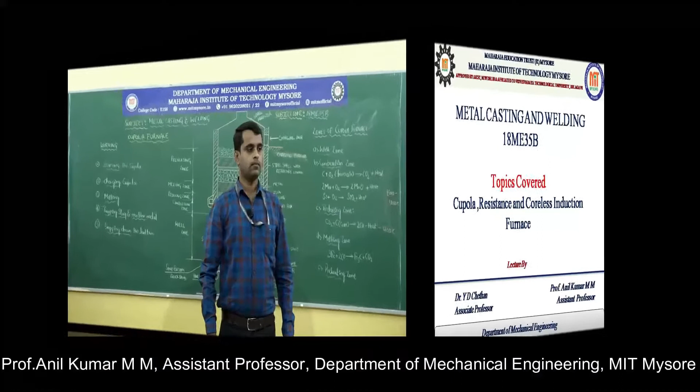In the previous session, we discussed different types of melting furnaces like direct and indirect electric arc furnaces, and fuel fired furnaces like coke fired, gas fired, and oil fired furnaces. In this session, we will discuss the construction and working of the cupola furnace. This is the block diagram of the cupola furnace.

Cupola furnace is used for melting only cast iron material. Although other furnaces like induction furnaces can also melt cast iron, the quantity melted is very less, around 10 to 25 kgs. But if you require large tonnage of material, the largest tonnage can be melted by using the cupola furnace.

This cupola furnace is mainly meant for melting only cast iron, and it is a vertical type of cylindrical furnace. Now let us discuss the construction and working of the cupola furnace.

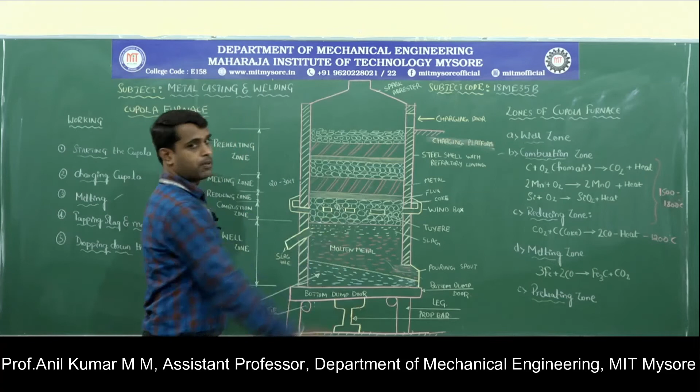Next zone is the melting zone, where the molten metal gets melted. This is located above the reducing zone, meaning from the top of the coke bed to the top of the metal charge. Here melting takes place as hot gases transfer heat into the metal, causing the material to melt.

The molten metal trickles down through the coke bed into the well zone, where it is collected. Iron reacts with carbon monoxide to give iron carbide and carbon dioxide. This reaction takes place in the melting zone.

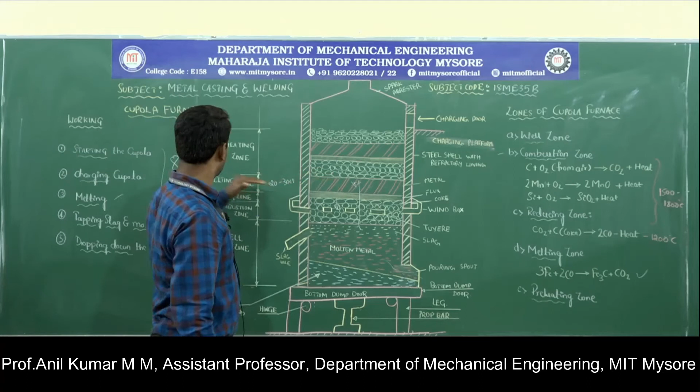Next is the preheating zone, located at the top of the melting zone, above it, from the top of the metal charge to the charging door. Here hot gases move upward in an ascending manner, transferring heat into the metal charge present inside the furnace. This is called the preheating zone.

These are the different zones that exist in the cupola furnace. First, the well zone, which is a reservoir that holds the molten metal. Then the combustion zone, above the well zone, also called the oxidizing zone, where rapid combustion takes place due to the supply of blast air inside the furnace, generating a large amount of heat.

The reducing zone, where carbon dioxide is reduced into carbon monoxide, picking up some carbon, causing the temperature to reduce. The melting zone, where melting takes place as iron reacts with carbon monoxide to give iron carbide and carbon dioxide. And the preheating zone, where preheating of the charge takes place.

The hot flue gases will be ascending upwards, and that heat will be transferred into the charge inside the furnace, so it will be preheated. These are the different zones that exist in the cupola furnace.

The cupola furnace is mainly used for melting cast iron material, and the largest tonnage of cast iron can be melted in the cupola furnace. Although other types of furnaces are also capable of melting cast iron, the quantity melted is very less, around 10 to 25 kg in the induction furnace or other furnaces. But in this cupola furnace, a large tonnage of cast iron can be melted.

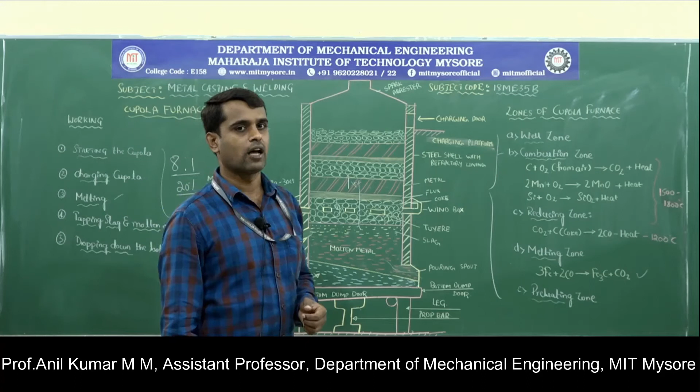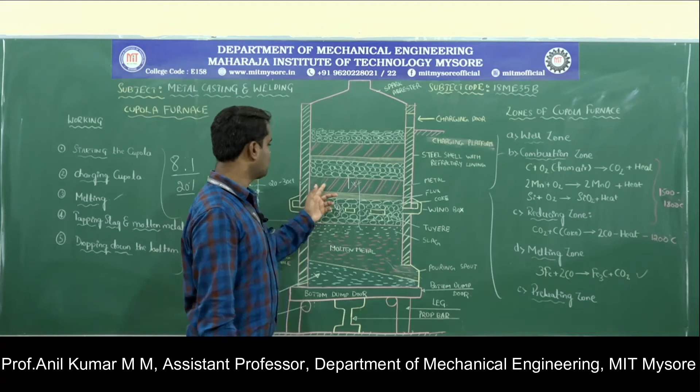In this type of furnace, the charge used has alternative layers of coke, flux, and iron. The iron to coke ratio used in cupola furnaces is 8:1 - for 8 parts charge to be melted, 1 part coke is required.

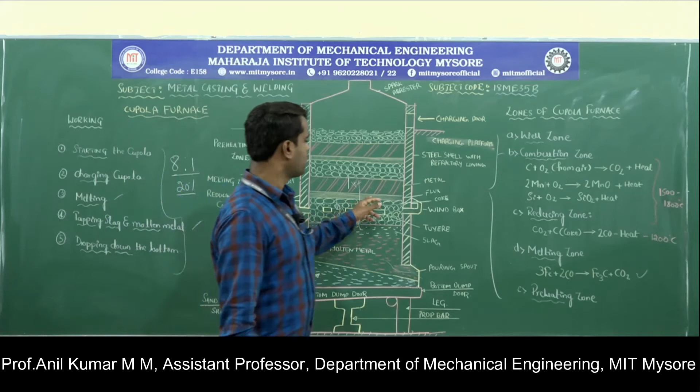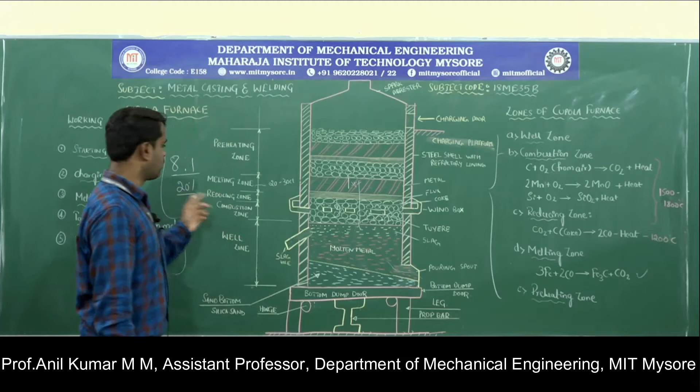The commonly used flux material in the cupola furnace is limestone, and the weight of flux added into the furnace is 20% of the weight of the coke. That is the construction and working of the cupola furnace.

Next we will move on to the resistance furnace. This resistance furnace is used for melting non-ferrous materials. Now let us discuss the construction and working of the resistance furnace.

This resistance furnace consists of a cylindrical steel shell. The outermost layer is made up of steel, and it is lined with refractory brick material. This lining is provided to the steel shell to prevent heat shocks and abrasion, and to prevent heat losses.

At the bottom, a round block is placed upon which the crucible will be supported. The diameter of the block is similar to the diameter of the crucible for proper accommodation and support. The crucible is generally made up of refractory material like clay, graphite, or silicon carbide.

Inside the crucible the charge will be added. Inside the lining, the heating coil or resisting coil will be provided, and this resisting coil is connected to the power source. At the top of the furnace a lid will be placed, with a small opening provided to let hot gases escape from the furnace. That is the construction part of the resistance furnace.

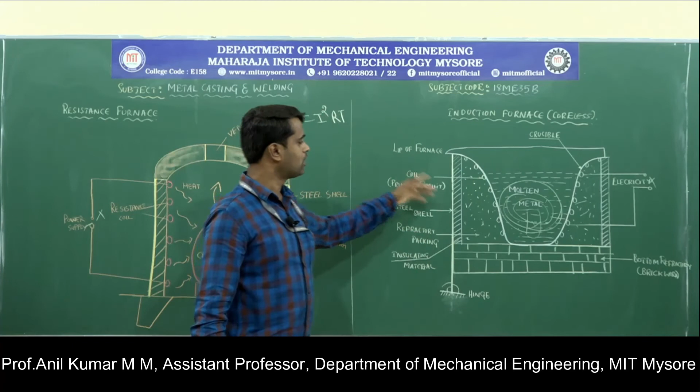This induction furnace works on the principle of the transformer. The copper coil acts as a primary circuit and the metal acts as a secondary circuit. When a suitable current at a suitable frequency flows through the copper coil or resisting coil, heat will be generated.

The secondary current will be induced into the material due to the resistance offered. When current flows through the coil, it resists the flow of electric current, and when it resists this flow, heat is induced, which melts the material.

In this molten metal, a stirring action takes place due to the eddy current induced into the metal charge by the electromagnetic force, occurring at the center of the crucible.

Due to the stirring action, the temperature is uniformly distributed into the molten metal. Once sufficient temperature is reached or the metal gets melted, you switch off the power source, tilt the furnace, and pour the molten metal through the lip of the furnace into the ladle.

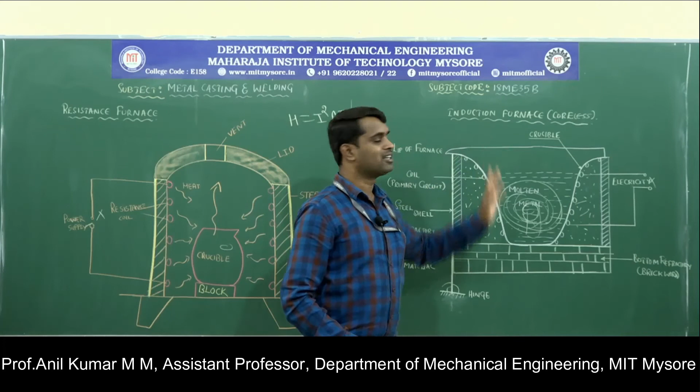That molten metal can be poured into the mold cavity, and then we get the casting. This coreless induction furnace is used for melting ferrous material, which can be melted using the induction furnace.

Next is the electric arc furnace. It utilizes an electric arc, generated between two conducting materials - the electrode and the metal charge. This heat melts the metal inside the crucible or furnace.

This type of furnace is used for melting cast iron and steel. The major advantages of the electric arc furnace are high thermal efficiency, rapid heating, and controllable temperature. The electric arc is generated, and with its help we can melt the metal inside the furnace.

Coming to the construction of the electric arc furnace, it is classified into two types: the direct arc furnace and the indirect arc furnace. In the direct arc furnace, the electrode is in direct contact with the workpiece material and stabilizes an electric arc, which is struck between the electrode and the metal placed inside the furnace.

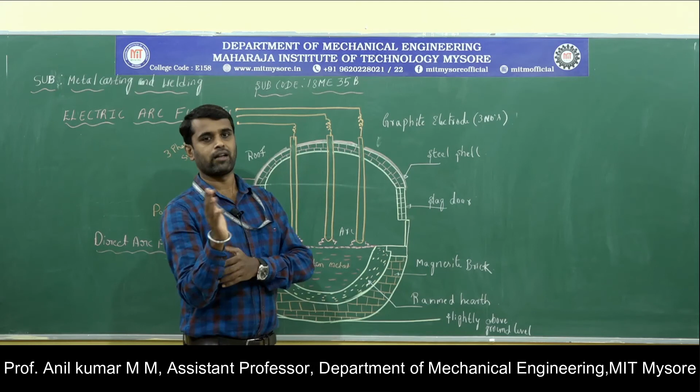By tilting the furnace forward, we can pour the molten metal into the ladle from the furnace. The tilting platform facilitates tilting either forward or backward. Tilting forward allows pouring the molten metal into the ladle, while tilting backward allows us to remove the slag present inside the furnace.

A pouring spout is provided so we can pour the molten metal through it into the ladle. The charging door is provided to add charge inside the furnace, and it is also used for removing slag from the furnace as well as for inspection purposes.

A roof is provided on the furnace, also made of steel shell lined with refractory material. We can add charge through the roof by opening it. In the roof of the furnace, three cylindrical holes are provided for accommodating the electrodes.

The non-consumable electrodes will be accommodated through the roof, and these electrodes can be connected to the 3-phase power source. This is the construction part of the direct arc furnace.

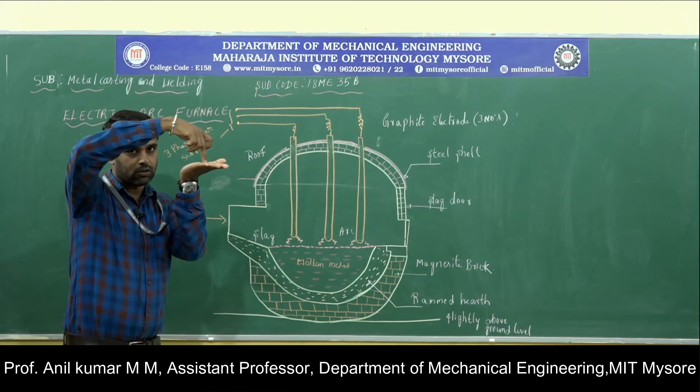These electrodes can be raised and lowered with the help of the guide. Initially you bring the electrodes closer to the metal charge and then separate them; at that time, in that gap the electric arc will be generated. This electric arc melts the charge inside the furnace because the temperature is very high, so whatever metal is placed inside the furnace gets melted.

Once the desired temperature is reached, cut off the power source, raise the electrode inside the furnace, and tilt the furnace in the forward position to pour the molten metal into the ladle. Before tilting forward, first tilt the furnace in the backward position to remove the slag present inside the furnace.

Initially, while adding the charge, we also add flux. This flux reacts with the molten metal and forms slag. Whatever impurities are present inside the molten metal react with the flux material and form slag, and this slag protects the molten metal from oxidation.

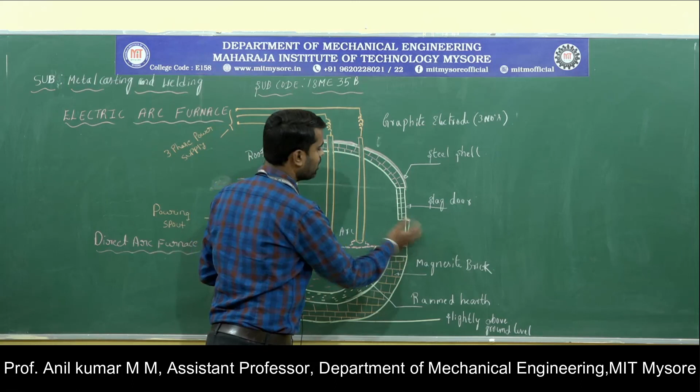When you tilt the furnace in the backward position, we remove the slag present inside the molten metal, and after removing the slag we tilt the furnace in the forward position to pour the molten metal into the ladle. That molten metal is poured into the mold cavity to prepare the casting. That is the working of the electric arc furnace.

This type of furnace is used for melting cast iron and steel material. Here, the heat source is the electric arc struck between the electrode and the melt, and heat is generated at that time. With the help of that heat we melt the material inside the furnace, and this furnace can be placed on a tilting platform.

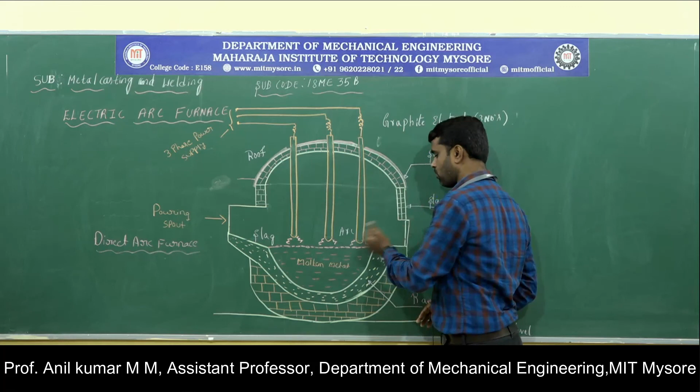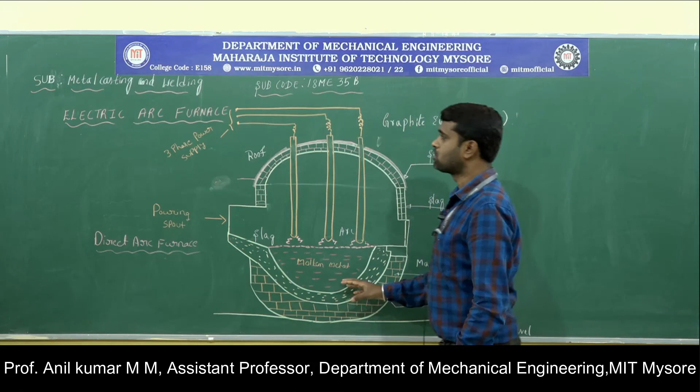We can tilt the furnace in the forward as well as the backward position. We tilt the furnace backward just for removing the slag, and we tilt it forward just for pouring the molten metal into the ladle. That is the working principle of the electric arc furnace. Thank you.